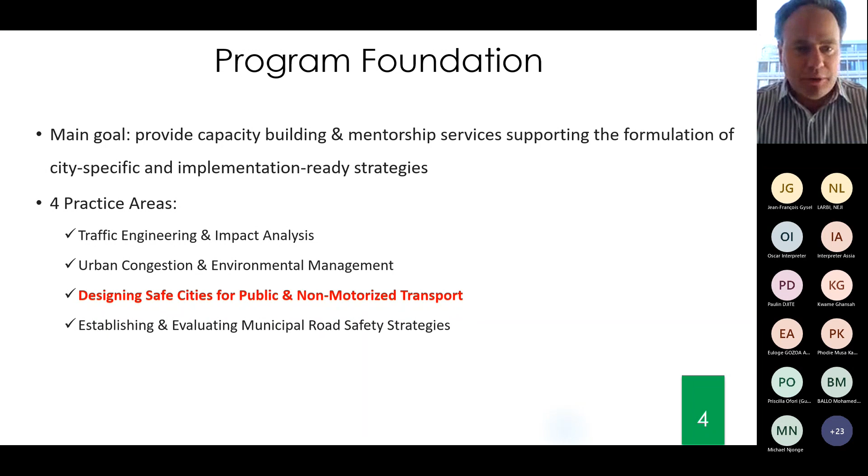Just a few words about the workflow, how we are delivering this program. We have an ambitious timeline. We started with an orientation webinar, which led to initiating 2 separate tracks: one focusing on traffic engineering disciplines in the context of fast motorizing cities on the African continent, and the other focusing on traffic safety. These are organized through two separate webinars. For those particularly interested in traffic safety, we will meet again on March 8th, where we will progressively transition from the engineering and design good practices covered today, to leadership and safety strategies at the urban level for African cities.

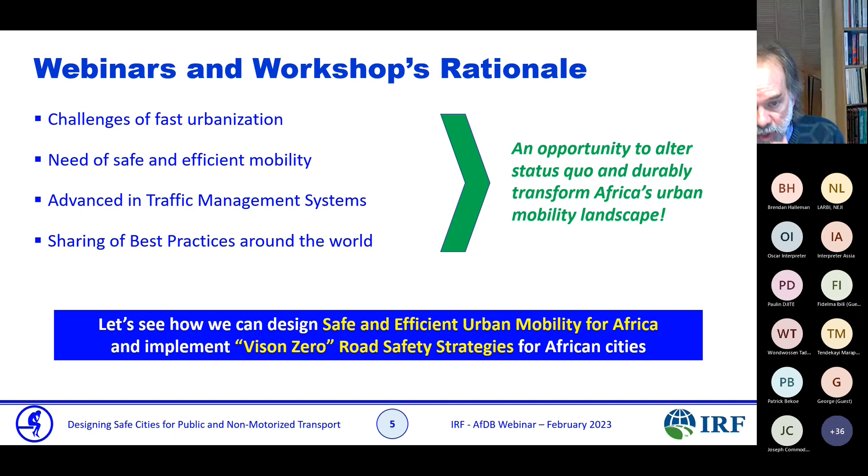So that's what we're going to be doing today. This first webinar we'll be talking more about engineering. The next webinar in March will be about Vision Zero and the strategies and political requirements necessary for implementing Vision Zero for African cities. So we'll be talking about planning and engineering, focusing on vulnerable users - pedestrians, cyclists, transit users, and motorcyclists.

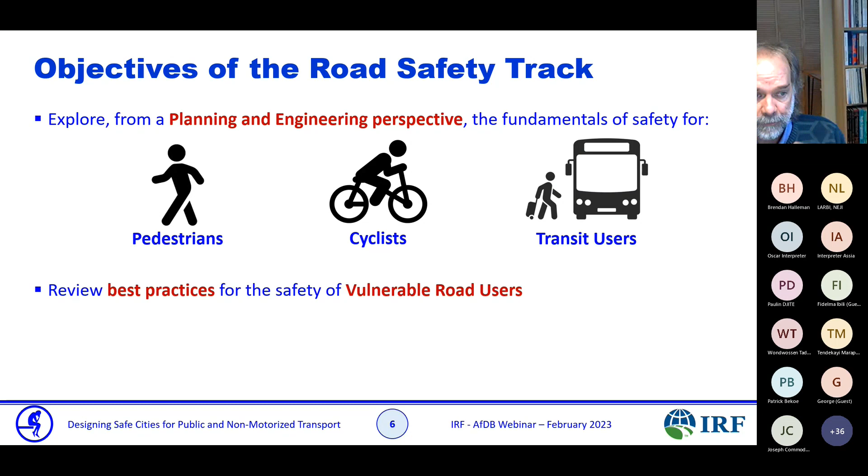We'll review best practices for those, and try to analyze what could be applicable for the reality of African cities. We'll explore what can be learned from other cities while shortening the learning curve, so we can leapfrog a couple of steps. This first webinar, today, will explore more the threats for life facing a wide number of road users in African cities.

And I think that's very important. Being vulnerable users, the key word here is vulnerable. How can we protect pedestrians and cyclists from being hurt by heavier, faster vehicles? So we need to look at their needs. They need to be able to go from point A to point B in a safe manner. We'll talk about how we can separate VRUs from heavier and faster vehicles.

How can we set up appropriate speed limits? Putting a speed limit which is not appropriate, not credible, not in relationship or coherence with the road geometry doesn't make sense at all, because it won't be respected. So that's something we'll be looking at. We'll also look at different street guidelines and how we can apply them.

But first, I'll spend a few minutes talking about the stats about the African context and road safety. Even though Brendan talked about it, it's good to look at that in more detail.

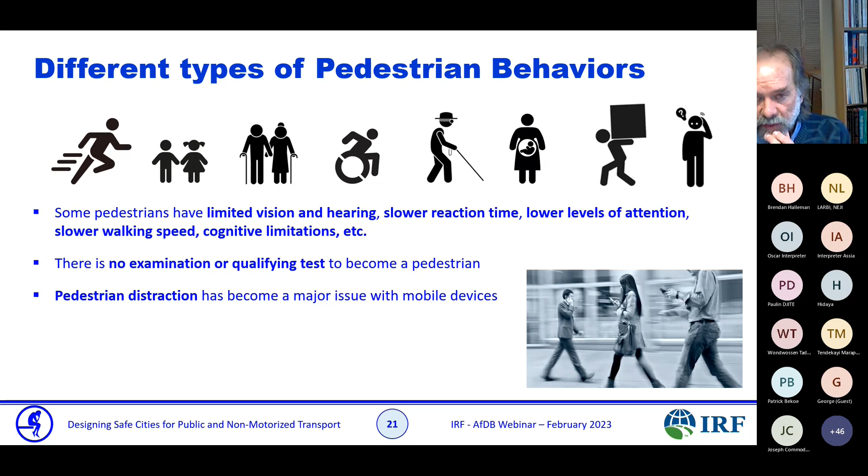I just want to say a few words about children pedestrians because they're very specific. They do have a different behavior from adult pedestrians. We need to take that into account. Their own perception of safety is not very well formulated. They don't realize danger the way an adult does. Their idea of critical behavior is not very well developed yet.

So the best way to improve child pedestrian safety is to keep them away from the road and make sure they've got somewhere to go, because if there is no space, they're going to go onto the road. The other interesting point is that we should not direct safety messages to them. We should direct safety messages to the approaching motorist. That's why we have specific signs about school zones and playgrounds where we tell motorists to watch out for kids, because the kids won't watch out for themselves. We need to warn the motorist in advance, letting them know there are kids playing around, there are schools, and the more we inform motorists, the better they can adjust their speed.

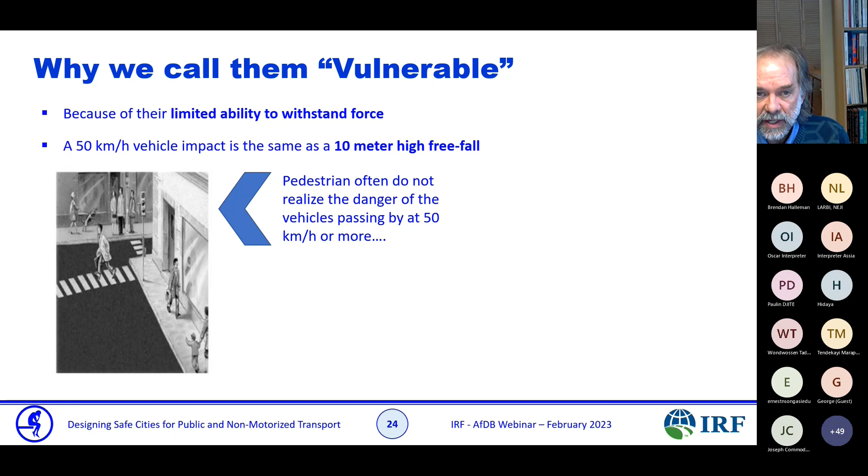Pedestrians don't realize when they're walking on the curb or crossing the street that it is exactly the same as being next to a 10-meter deep hole adjacent to the curb. If people could see a deep hole right next to them, they would be scared and would not get close to it. But we don't see them, we don't realize it, so we just walk on the street very close to the car, and people get hurt. We should know that and be aware of that.

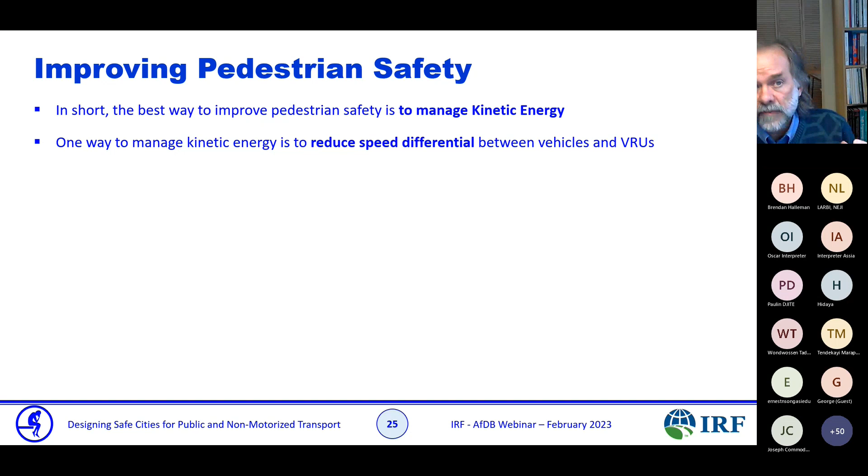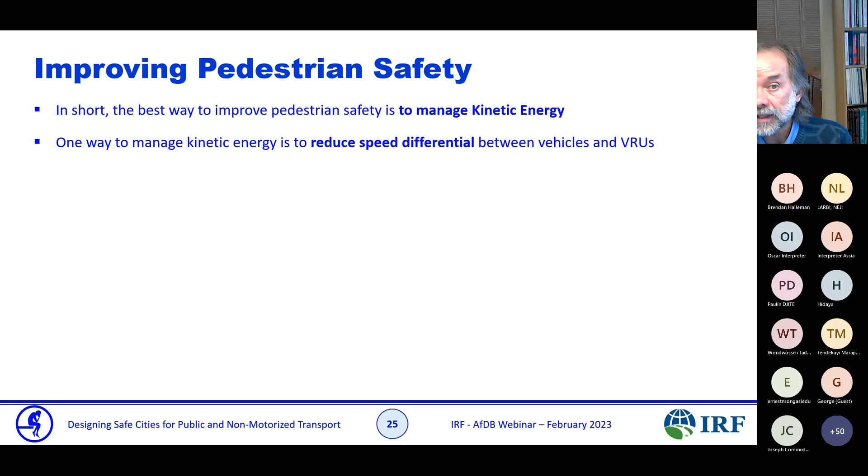How do we improve pedestrian safety? The best way to do it is to manage kinetic energy. One way of doing it is obviously to reduce the speed differential between vehicles and vulnerable users. The less the speed differential, the less likeliness of an impact, injury and death.

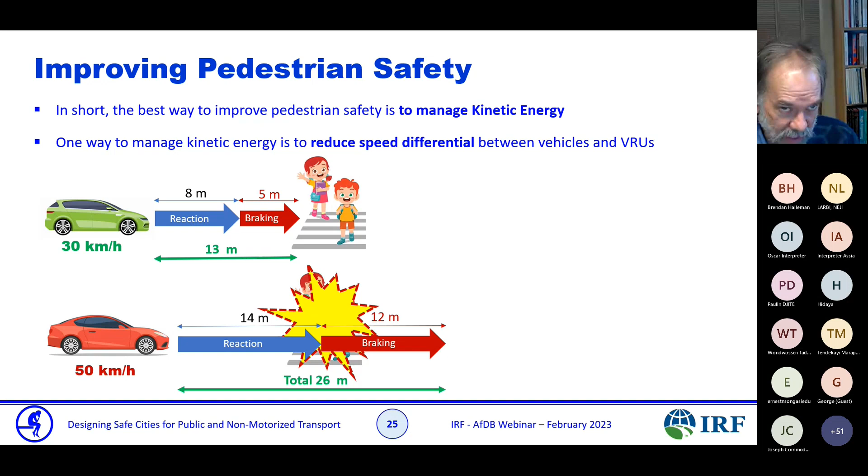That's why we're talking about reducing speed. It's making a lot of difference. The slower the vehicle, the more chance you have to avoid a crash, and if there is a crash, the impact is going to be less. At 30 kilometers an hour, your chance of survival is 90%. At 50, it's going down to 20%. At 70 kilometers an hour, you have no chance of surviving because your body cannot sustain the impact. You are going to die, for sure.

That's why we reduce speed and push on reducing speed near schools, hospitals, playgrounds, where you have pedestrian activities. This is one of the things we should look into when we talk about African cities, making sure that—because there are a lot of activities alongside the roadways—you've got vehicles driving by at 80, 100 kilometers an hour, very close to vulnerable users. They have absolutely no chance of survival if one of the vehicles hits one of the pedestrians on the side of the road.

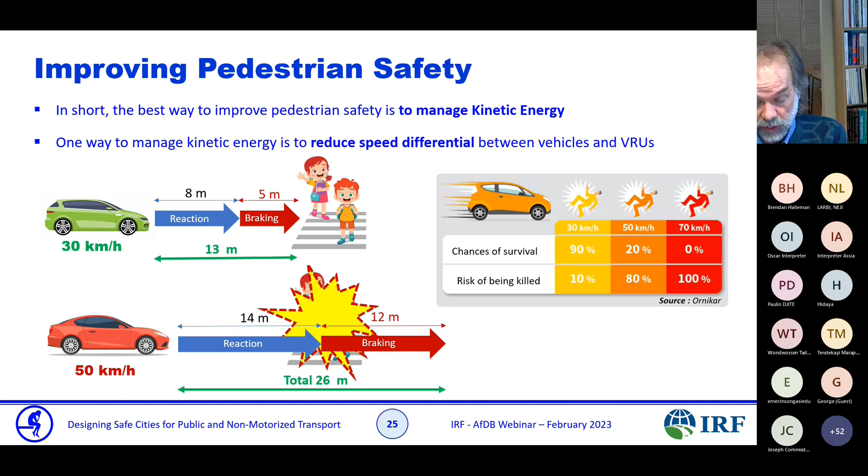So how do we improve pedestrian safety? First, we manage speed. We make sure we can adapt the speed limits to the street function and the local context. We absolutely need to make sure that speed is in accordance with what's happening there. One issue in African cities is that national roads cross villages and the road remains the same—straight roads going through, and it just says 30 kilometers an hour. But if the road itself does not change, or there is no geometric design showing a difference, people are going to be driving fast, no matter what the sign says. We'll show you how to do it in a couple of minutes.

We need to make sure we reduce speed around school zones, commercial streets, pedestrian areas, crosswalks, hospitals, bus terminals, bus stops—all those places where you have VRU activities, you need to manage speed. The other thing is signs and marking. We need to make sure motorists are informed about pedestrian activities. There are a lot of signs and markings that exist to warn drivers about pedestrian activities. We can have crosswalks, controlled or uncontrolled, stop lines, and signs for schools, playgrounds, and health centers.

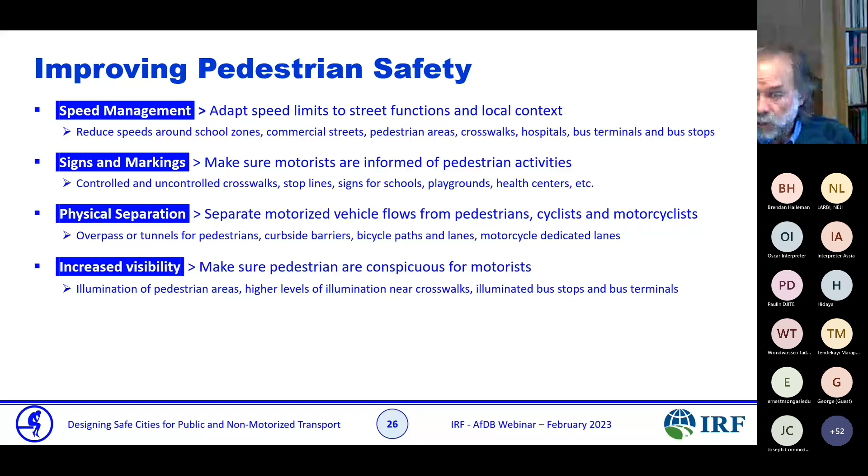That's what we look at, so we can implement a lot of small things that are going to improve safety overall. Another point is to increase visibility. Very often pedestrians are not seen, and when a pedestrian is hit, one of the things the motorist says very often is that I did not see him or her. So we need to make them conspicuous for motorists, with proper illumination of pedestrian areas, higher levels of illumination near crosswalks, and illuminated bus stops. We need to find ways to make sure VRUs can be seen.

If there are puddles of water, pedestrians are going to go around them and walk on the road to avoid walking in the water. So we need a network that connects major points of interest—commercial, institutional, health—making sure pedestrians can go from one to another or reach public transit access points easily. Another point is universal accessibility, allowing people in wheelchairs, people who have difficulty walking, blind people, deaf people, to be able to walk and use the network, with proper guidance to avoid conflict with motorists.

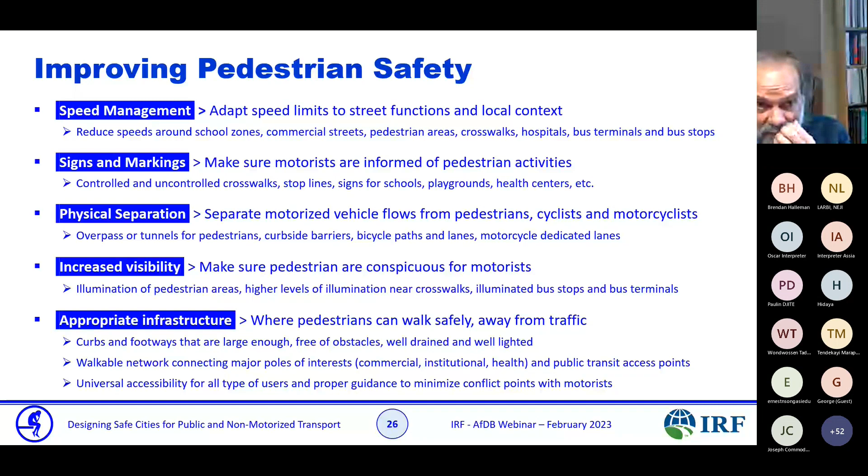So let's look at speed management in more detail. Some facts about speed, which are obvious—what I'm showing here is so obvious, but people don't think about it. We should be aware that speed is a factor in all crashes and all injuries, and that's obvious. If there is no speed, there is no impact, and if there is no impact, there is no injury and no death. So how do we get the right compromise between mobility and a sufficient amount of speed to be efficient and safe?

So speeding is associated with both the number of crashes and the severity of crashes. About 30% of all fatal crashes worldwide are related to speed. So that's one area where we can work and do something interesting to improve safety.

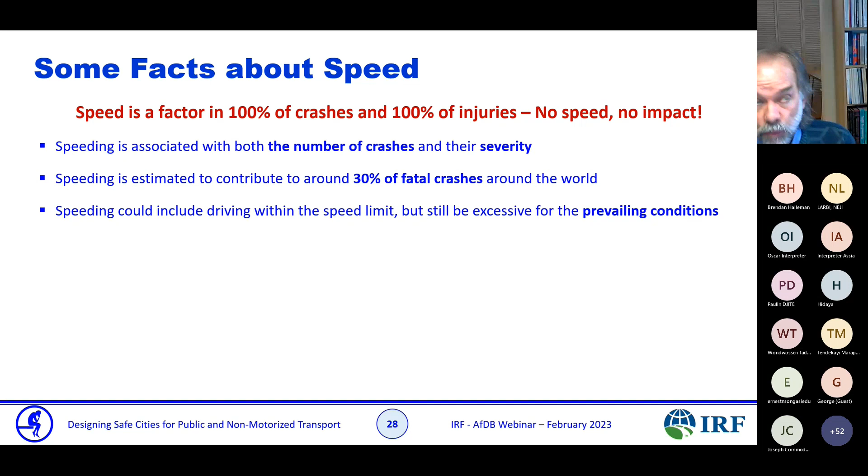Speeding could include driving within the speed limit, but still being excessive for the prevailing conditions, and we see that very often. That's why in many cities in the world, the speed limit in cities, which used to be 50 kilometers an hour, has been reduced to 40, and some cities, for example Amsterdam in the Netherlands, are reducing it to 30 kilometers an hour. So we are realizing that where there are vulnerable users, we need to reduce speeds, and we'll see how to do this.

Some parts of the road should be dedicated for mobility—those are major arteries, freeways, where vehicles can drive fast. But on those, we should not have vulnerable users. So where we have vulnerable users, on local streets, smaller arterials or collectors, we should make sure that speed is lower.

I talked about kinetic energy, I'll come back to it very fast, but many people don't know the formula. What I'd like to show here is that the kinetic energy of a vehicle is proportional to the square of its speed. So the risk of death for a pedestrian is not twice, but 4 times greater when hit by a vehicle at 65 compared to 50, because it's not linear. So that's something we should take into account.

Reducing the speed from 50 kilometers an hour, where your chance of survival is about 20%, going from 50 kilometers an hour to 30 raises your survival chance from 20% to 90%. That's exactly why we talk about reducing speed near school zones and where there are vulnerable users.

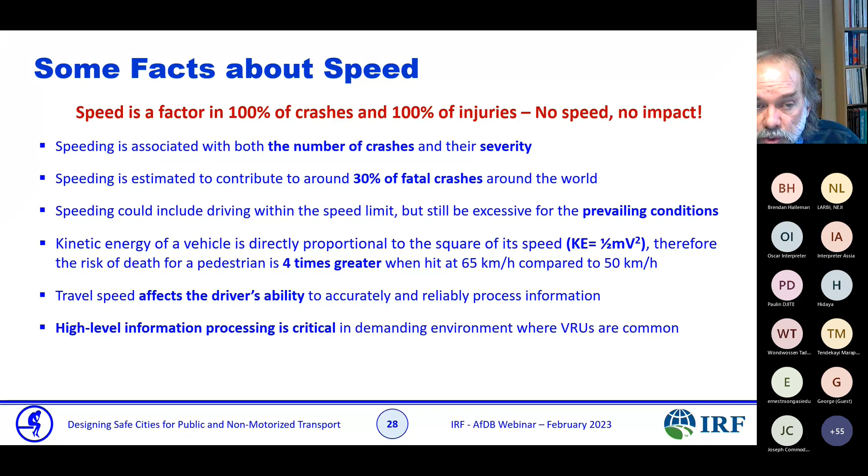However, high-level information processing is critical in a demanding environment when there are VRUs. That's another reason for reducing speed in areas where there are pedestrians, because the driver's ability to process information is slower. So speed management is absolutely essential to protect VRUs.

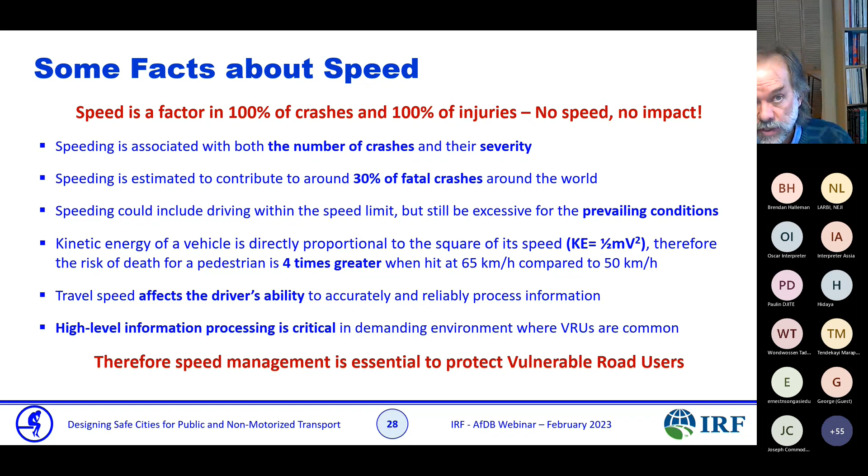There are several definitions of speed. I won't go too much into detail, but just to make sure you understand what we're talking about. Design speed is the speed we use as part of the geometric design process to design a road. It could be 100 kilometers an hour for a freeway, or 30, 40, or 50 kilometers an hour for a local street.

Operating speed is the speed at which vehicles are observed during free flow conditions, which is not the same as design speed. It could be higher or lower. For example, on major arteries in urban cities, on a wide boulevard, the speed limit could be 50 kilometers an hour, but because it's straight and wide with wide lanes, people tend to drive faster. On narrow streets, the speed limit can also be 50, but the operating speed is much slower because motorists are afraid of hitting something - it's narrow, with parked vehicles and pedestrians, so they drive slower.

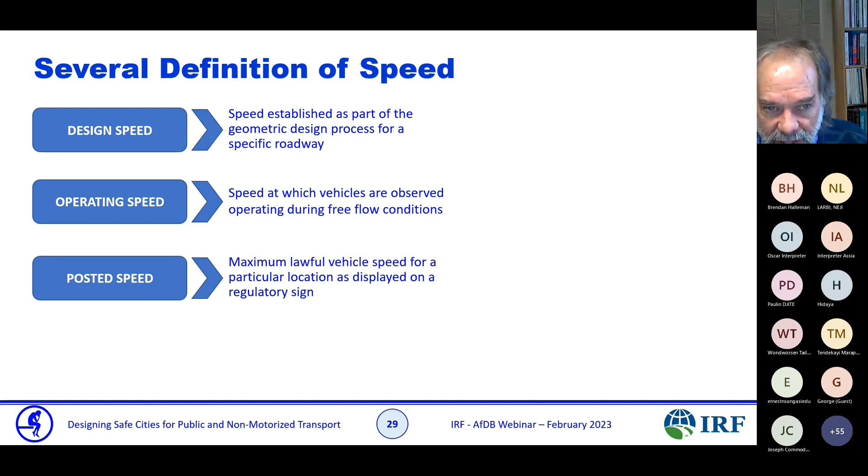So it's not related to the speed limit, which is a posted speed we can see here - that's the maximum lawful speed for a particular location as displayed on the signs.

Statutory speed is the speed limit established by the governing agency. For example, in France, the speed limit for freeways is 130 kilometers an hour. In the Emirates, it's 160. In Canada, we take safety very much into account, so the speed limit on our freeways is only 100 kilometers an hour. It depends on the country and the governing agency.

That's why pedestrian safety has two levels, and I'll talk about it a little more. It has to be top down, where government has to take action, but it also has to be bottom up, where we can have local action directly on the street, concrete action to improve safety.

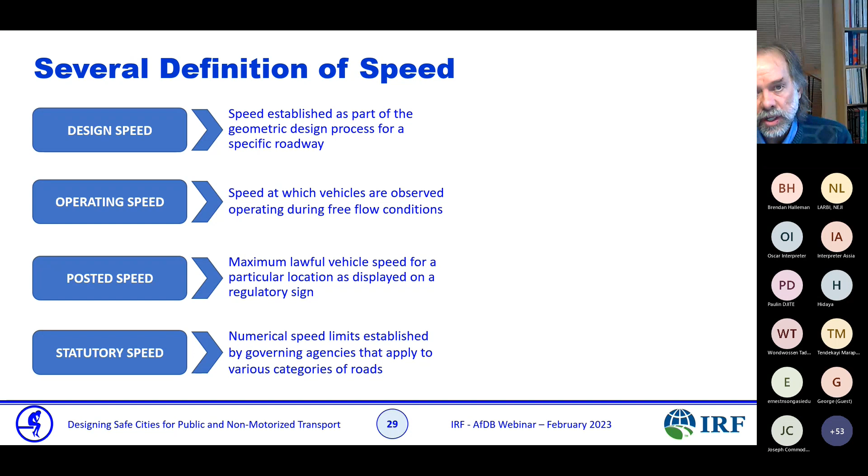The last point I wanted to talk about is the 85th percentile speed. That's something we use very much in engineering. It's a point in the speed distribution at which 85% of vehicles travel at or below, so it's considered the maximum safe speed for a location under good weather and visibility conditions.

So those are just facts to keep in mind when you do your design, when you think about your own area and how you can improve it. You should know those definitions of speed and the right one to use.

Consequences of speeding for drivers: as I said, it reduces the visual field and reduces the ability to accurately and reliably process information. There is more distance traveled during the perception and reaction time because we are driving faster, stopping distances are longer, and there is a greater potential for loss of control of vehicles.

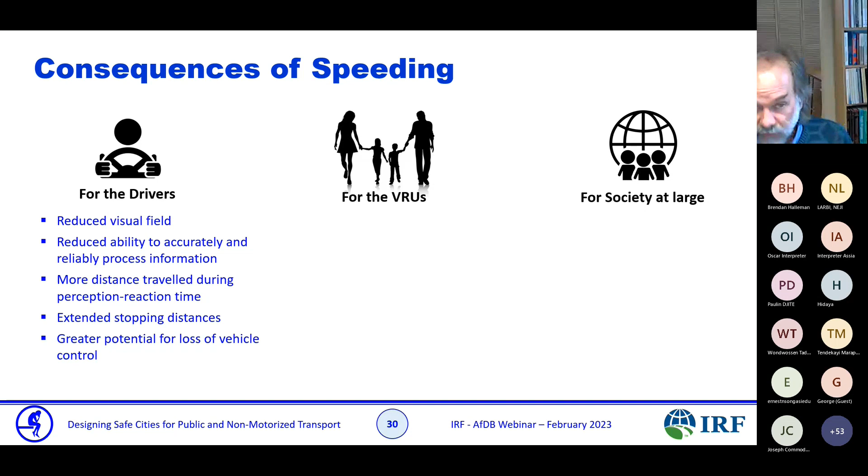For the VRUs, there is an increased feeling of insecurity when vehicles are speeding, reduced time to cross the street, reduced time to react to an event, increased severity of injuries, and obviously increased death probabilities in crashes.

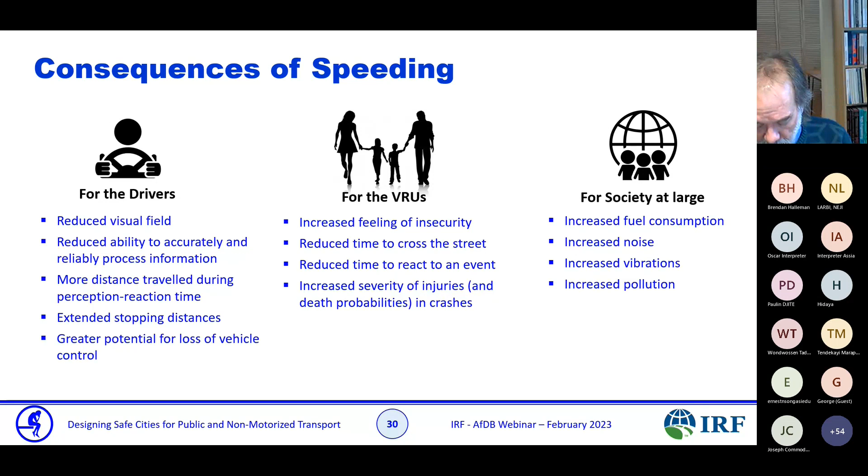And for society at large, we should take this into account as well - more speeding means more fuel consumption, more noise, more vibration, more pollution, and that's something we should look at. We should keep the environment in mind.

So what's happening in speed management currently is that the speed limit used to be aligned to driver preference for high speed travel.

As roads were being built and vehicles became more performant, people tended to drive faster and faster. It took a long time before we started limiting and reducing speed on highways. Before that, it was open, and in some countries it's still wide open. For example, in Germany on the Autobahn, you can drive as fast as you want on some sections, which is kind of scary. But statistics show they don't have more accidents than average. However, when they do have accidents, they are really bad, usually because of the speed.

Another interesting point is that most drivers tend to underestimate the likelihood of an adverse event that may cause harm. Most drivers don't think about a hazard.

I'm traveling quite a bit, and the most dangerous part of my travel is usually between my home and the airport, even though that's what I do all the time, driving my car or motorcycle. People tend to be more afraid of taking a plane than driving on the road, because they drive so often that they don't see the danger. But you've got much, much more chances of having an accident on the road than in a plane.

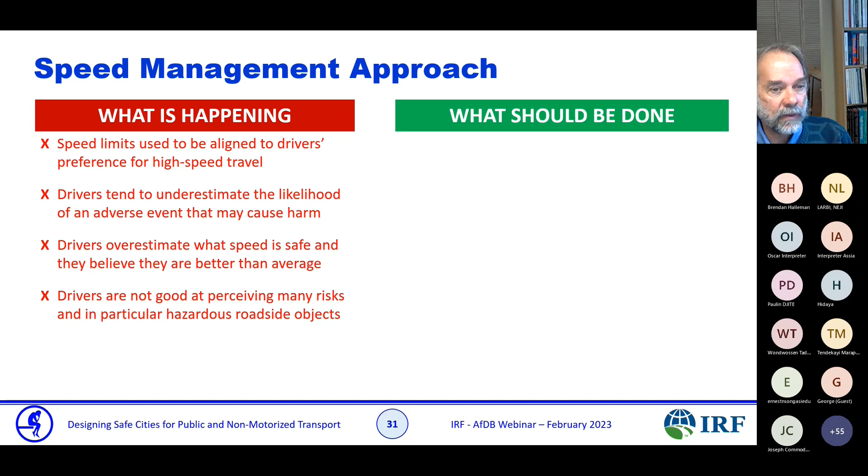The last point is that drivers are not good at perceiving many risks, in particular when there are hazardous roadside objects. People think in series, not in parallel, so we can do one thing well at a time, not too many things at once. When there's a lot of action and stimuli for the driver, they cannot perceive the risk properly.

So what should be done? We should manage speed, but the focus is not to lower speed all over. Despite what I said previously, the idea is not to put everything at 30 kilometers an hour. That's not the point. The point is to match mobility needs with the surrounding environment, the infrastructure, and safety. And that's not easy to do.

Motorist speed is directly influenced by the message sent by the road and street surroundings. So here we are talking about the coherence between geometry and speed, and that's what we do. I'll show you a couple of examples of how we do this.

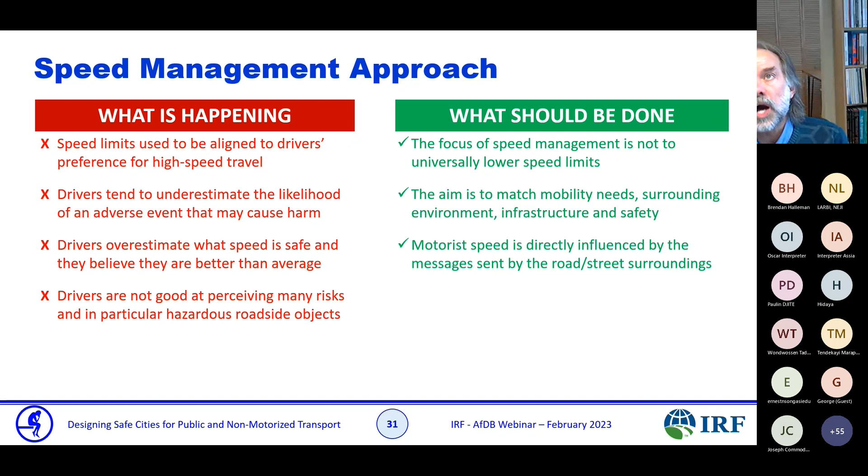We should let the road talk to the motorist. If the road is straight and wide, people are going to drive fast. If it's narrow, if there are obstacles on the road, markings and obstacles that push them to reduce speed, they're going to do it much more than any sign or marking on the road.

Speed limits must be established to take into account the human biomechanical tolerance limit. It's really crazy to allow vehicles to drive over 50 kilometers an hour near vulnerable users, because the biomechanical tolerance of a human isn't going to work if they get hit. They're going to be injured severely or die. So that's what we need to avoid.

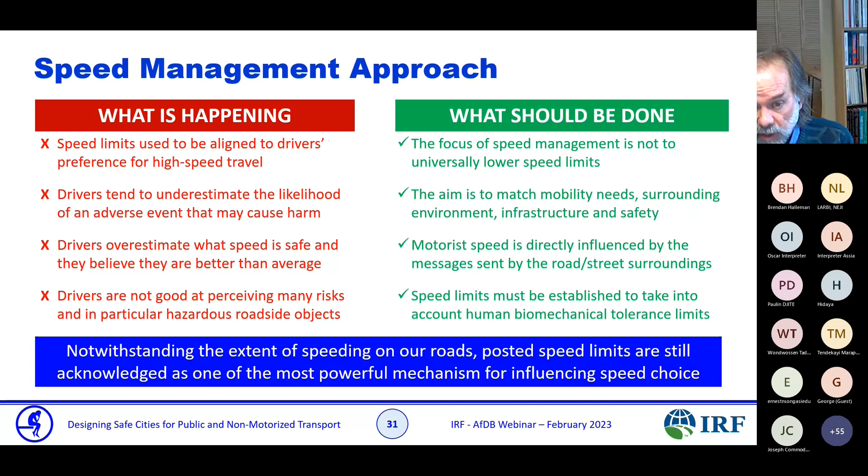Notwithstanding the extent of speeding on our roads, surprisingly, the posted speed limit is still acknowledged as one of the most powerful mechanisms for influencing speed choice. So we should use that. We should post the right speed limit, but not do it by itself. We should complement the posted speed limit with a lot of engineering, different solutions, traffic calming devices that I'm going to talk about, that will help reinforce the message that the posted speed limit gives.

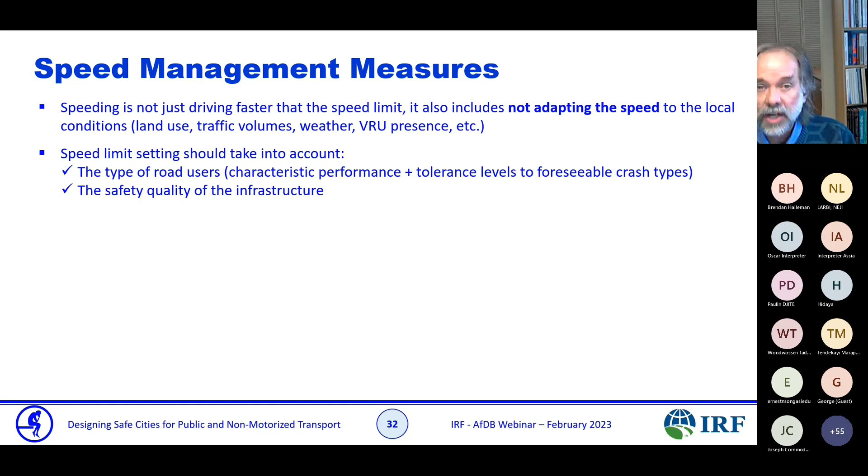Speeding is not just driving faster than the speed limit. It also includes not adapting the speed to local conditions. That's important to know. Speed limit setting should take into account the type of road user, as I said, and the safety quality of the infrastructure. Sometimes the infrastructure doesn't allow for higher speed because it's not in good shape, it's not well drained, and we should take this into account.

And I stopped there because I wanted to see if it had any effect, and nobody reduced speed because it doesn't make sense. If it's not credible, motorists won't respect it. We need to make sure it's credible, making sure we use the right road hierarchy, and see the difference between mobility and access function. I'll talk more about this in a couple of seconds.

Speed management requires several initiatives: setting appropriate and credible speed limits, adapting infrastructure and road geometry to the targeted speed, and ensuring adequate enforcement of the speed limit.

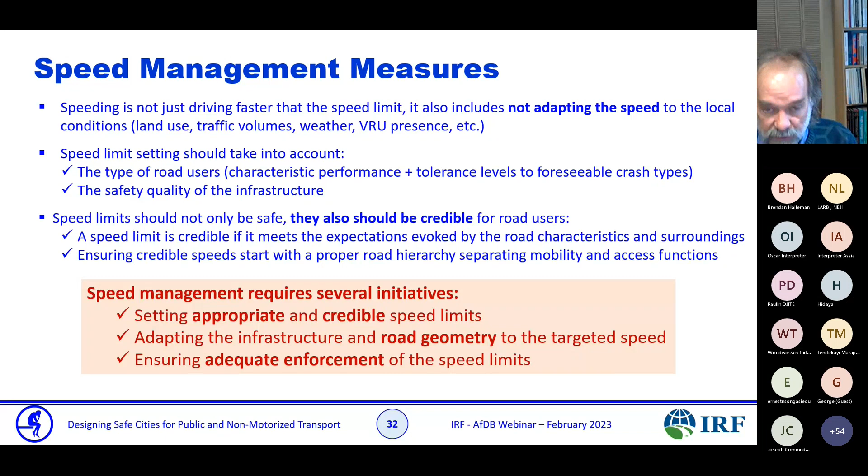Each road has a specific function. Some are favoring mobility and some are favoring accessibility. Road users understand the road hierarchy and usually they behave accordingly. VRUs and commercial activity must be controlled to reduce the incompatibility of mixed functions. That's very specific of Africa.

We should look into that specifically. Road designers and land planners should stop favoring motor vehicles to the detriment of VRUs. That's one of the main trends of perhaps the last 20 years, and the decade of road safety has been implementing this. We have been focusing very much on motor vehicles. The car was the king of the road. It should not be this way anymore.

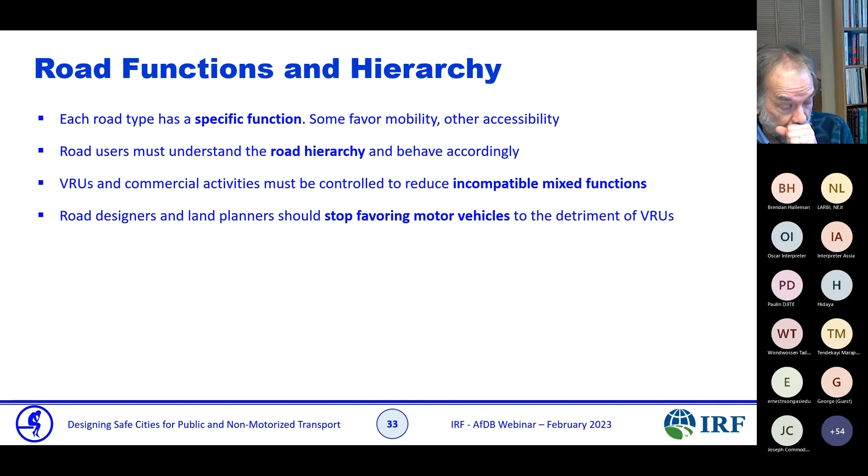We should favor much more active transportation. We should protect vulnerable users because it's good for health, because it's what most people can do - walk and use their bicycles - and it's cheaper and better for the environment. So motor vehicles and cars, I'm not saying they are not good and we should not use them, but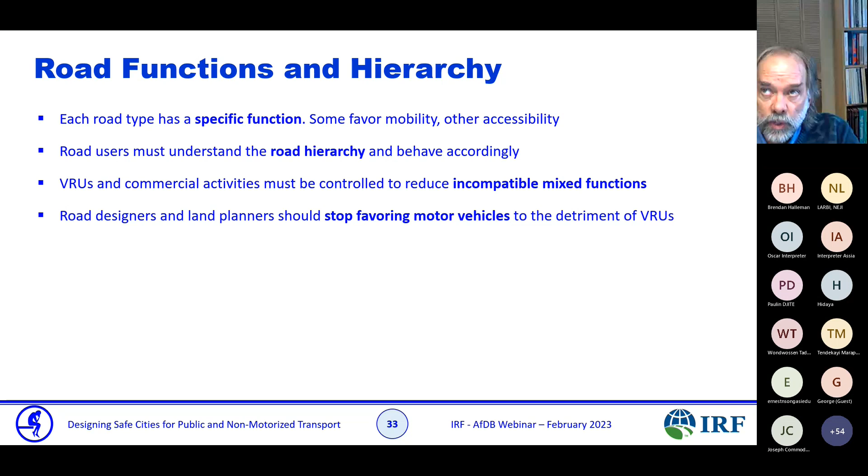they should not be in the center of all we do. What should be in the center of what you do is the human. We should have a human-centric design and reflection. That's my next point here. Road designers and land planners should develop a human-centric approach in their work. We should develop - I'll show you how - a bottom-up vulnerable user scheme.

Start from what the local conditions are, what are the possibilities to work specifically on the local area to improve the pedestrian network: sidewalk, curbs, signing, design. At the same time we should have top-down government initiatives and bylaws that will help that.

The other thing we should try to do is make the best use of advanced technology. As you know, we are going into the Internet of Things. Vehicles are going to be more and more connecting to the road and to other vehicles, and we should try to see how we can use that to improve and enhance mobility and safety, which is quite interesting. What I'm afraid of, and that's why I wrote this last sentence here, is that we could leapfrog, because technology allows that. However, it's important to progress step by step.

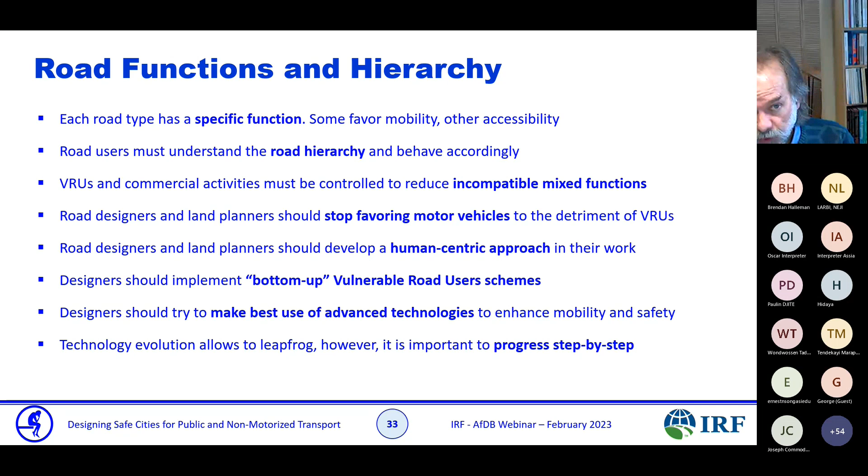In many African countries, for example, the phone network has not been well developed, and you went directly from not having a phone to the mobile phone with Wi-Fi, skipping the fixed line that we did have, which is fine. But by jumping over that, sometimes you are jumping over very important actions. So remember that in the way you work, you need to progress step by step, and make sure you can use experience from others and what they've done, on the positive side but also on the negative side.

Road hierarchy - here I show you a quick picture. This is what a road hierarchy looks like. On the left-hand side you can see a freeway. You can see separate lanes, no accesses, cars can drive fast, and there are no vulnerable users on the road. That's what it looks like.

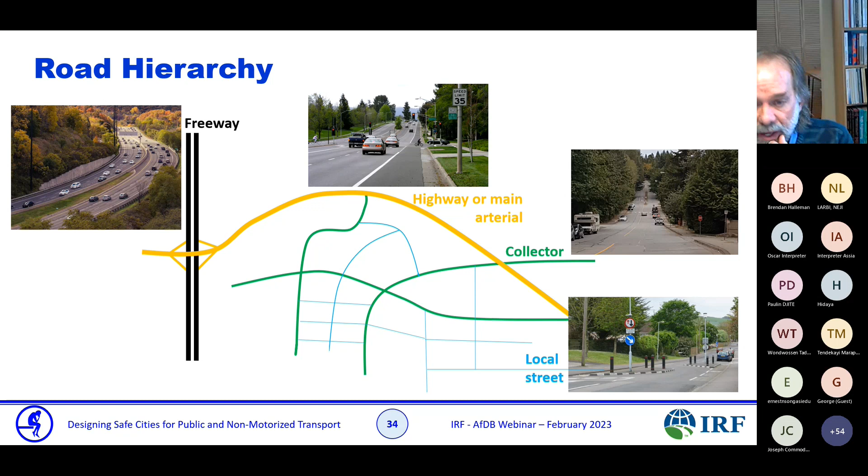On the top center here you've got a highway or main arterial, which is a wider road. You have controlled access, traffic lights, and usually the vulnerable users are separated - you've got curbs, sidewalks, and bicycle lanes. Then in green here you've got collectors, which are narrower streets with curbs and parked cars. Eventually you come to a local street where you can have very specific traffic calming devices implemented. Here you can see a chicane that helps reduce vehicle speed.

Very often, national roads cross linear villages without any modification of the road geometric design. So we should warn motorists that they are entering a village, entering commercial activities. You should have markings, signs, speed bumps, gateways that will help tell people to watch out for vulnerable users.

Speed limits are not credible due to a lack of coherence with the surrounding environment. Too many uncontrolled roadside activities along the road, and uncontrolled commercial activities and street vendors within the right of way. That's something we should look into and try to control.

Also, there is an issue with parking space for motor vehicles. They need to stop their car, and very often there is no space, so they park directly on the road. So, speed management process program, how do you do it?

Well, you need to identify speeding issues, determine partnering agencies - that's something that should be done in coordination - identify countermeasures, implement countermeasures, and evaluate the project and program to make sure that it's working.

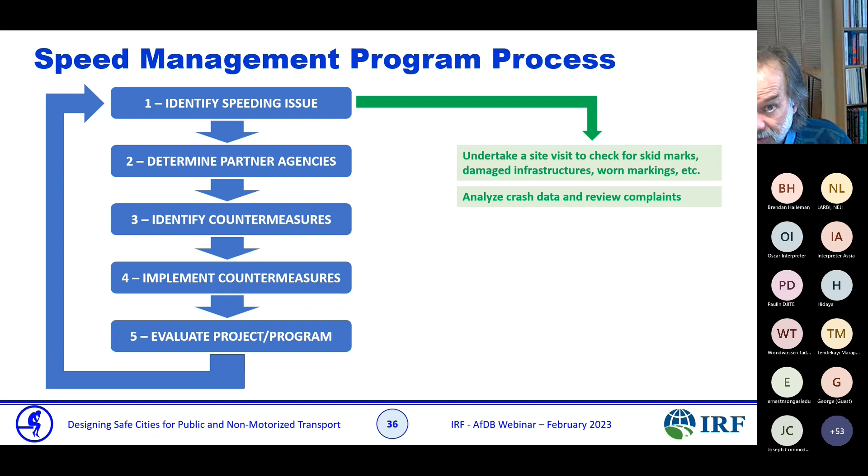Do you have crash data? And do you have people complaining that cars are driving too fast? You should do a speed spot check and validate the data. Is it an issue or not? Very often people perceive speed as too fast, but when you do a spot check, it's not going too fast.

It's just a perception. You should analyze the coherence between posted speed limit and the surrounding environment. If you have a national road with a speed of 60, 70 or 80 kilometers an hour near commercial activities and vulnerable users, it's not proper, it's not coherent. You should search for unexpected conditions or types of activities.

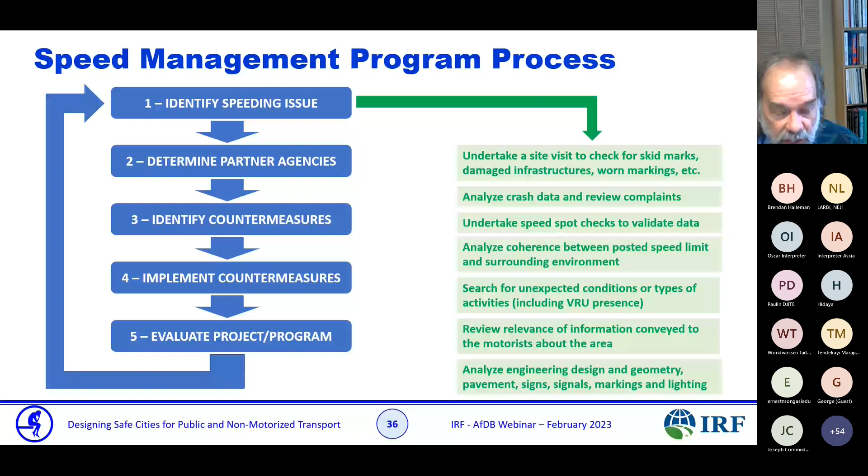For example, VRU presences. You should review the relevance of information conveyed to the motorist about the area. Is the motorist aware of commercial activities and vulnerable road users? Is the motorist well informed in advance of a danger? And of course, engineering design, geometry, pavement, signs, signals, marking - I'll show you examples in a couple of minutes with pictures.

Speed management tool, we'll talk about this also in the next webinar, but we should implement a safe approach: safe road, safe speed, safe vehicle, safe people. It's not only safe road or reducing speed. It's a global approach that takes into account the different elements - vehicle, people, speed, roads - making sure all of them are safe.

We should make sure the infrastructure sends the right message to the road user. We need to help drivers see and understand the risk by posting credible speed limits. If it's not credible, they won't look at it and they won't understand the risk.

We should have awareness campaigns. We should enforce the speed limit with police control and fines. I know that's very difficult in many low-income countries. I know in many countries there is a lot of corruption, and people can easily, instead of paying the fine, give a little money to the policeman and say, let me go. That's very much linked with the income of the country. I'm fully aware of that, but it's something we should work on.

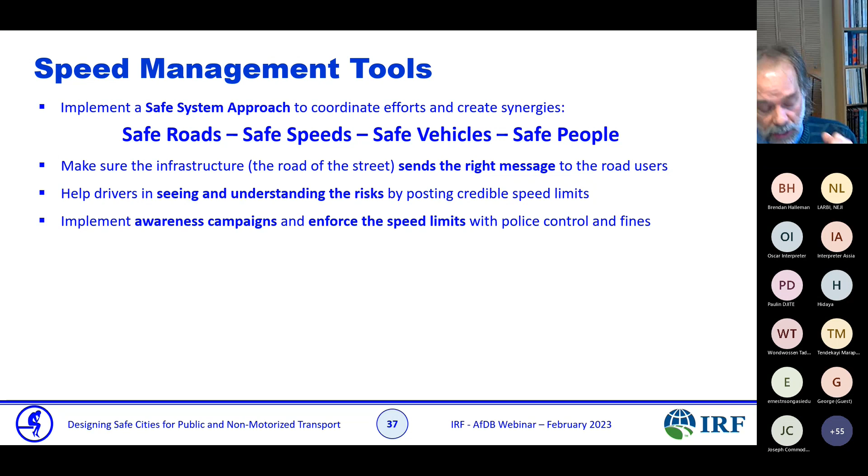One way to improve safety is what we call the carrot and the stick. The carrot is we should congratulate people for behaving properly, but we should use the stick to tell them that's not the way to do it. That's not an easy balance to get, but we should be working on it.

We should educate all road users. As I said, pedestrians and cyclists are not licensed, they don't know the rules of the road. We should enforce them and make them aware of the danger. We should impose vehicle speed reductions through implementation of traffic calming devices, which we'll show in a couple of seconds.

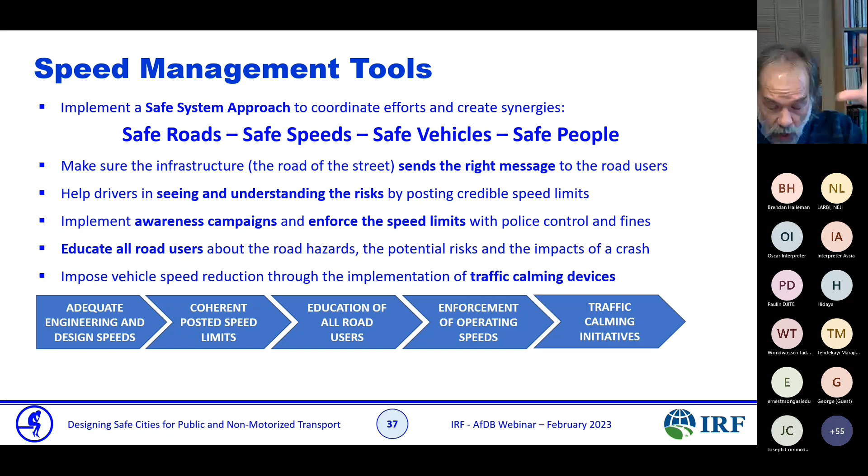So the way of looking at it is: first we start with adequate engineering and design speed, make sure we have coherent posted speed limits, make sure all road users are well educated, ensure proper enforcement, and start putting in traffic calming devices. On top of that, we should have self-explaining roads that talk to the motorist by themselves. Another point is forgiving roads, because we know people make mistakes. So if a motorist or vulnerable user does make a mistake, is there a way to avoid a major injury or death?

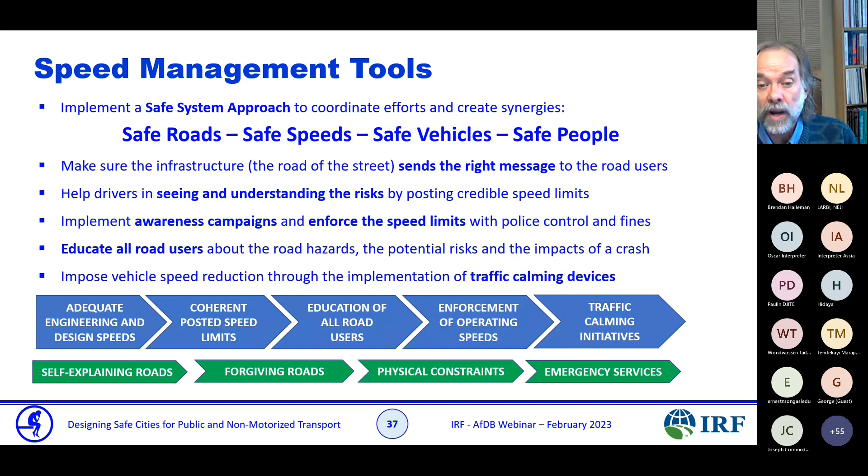Can we implement physical constraints to make sure that if a vehicle goes off the road, it's not going to fall off a cliff or drive on the curbs? And the last point is making sure we've got proper emergency services if there is an accident. The best idea is, of course, to avoid an accident, but if there is one, how can we limit the consequences? We'll talk about all this in the next webinar.

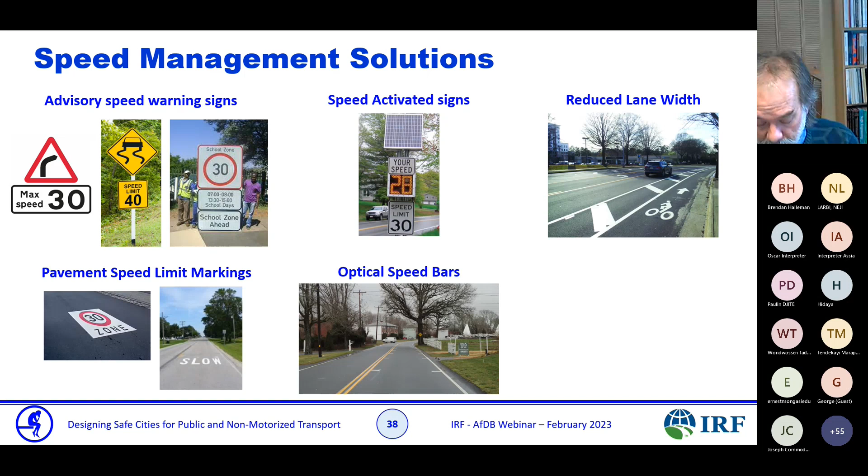Another thing that works well is optical speed bars. Those are small bars along the road, as you can see on the picture, and that creates an effect of narrowness for the driver. By instinct, the motorist is going to reduce speed because he's going to feel that it's narrower, and that's quite efficient. Reducing lane width is the same thing - it just makes people think it's narrower, so they're going to be driving slower.

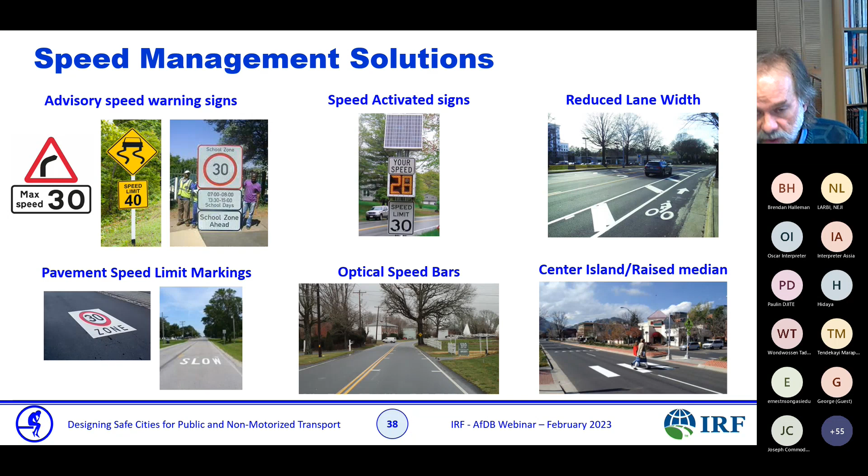Another thing is center island, raised median. So it gives a chance for pedestrians to cross the road in two parts, and while they are waiting in the middle of the road, they are safe because they're on an island and somewhat protected.

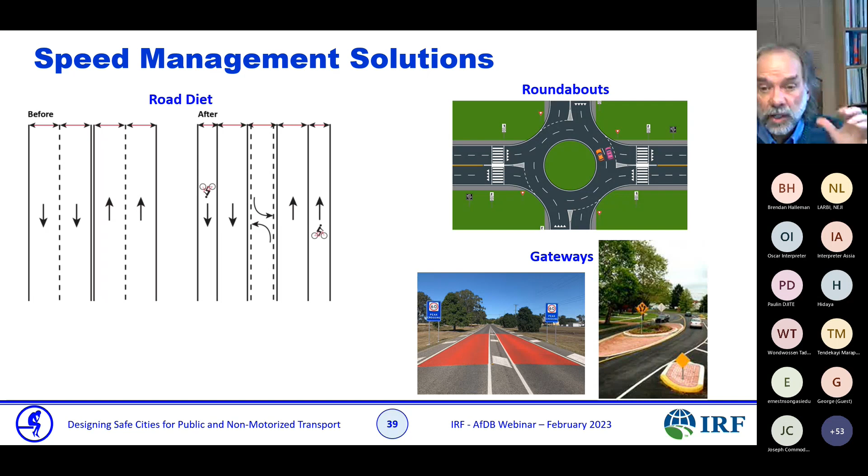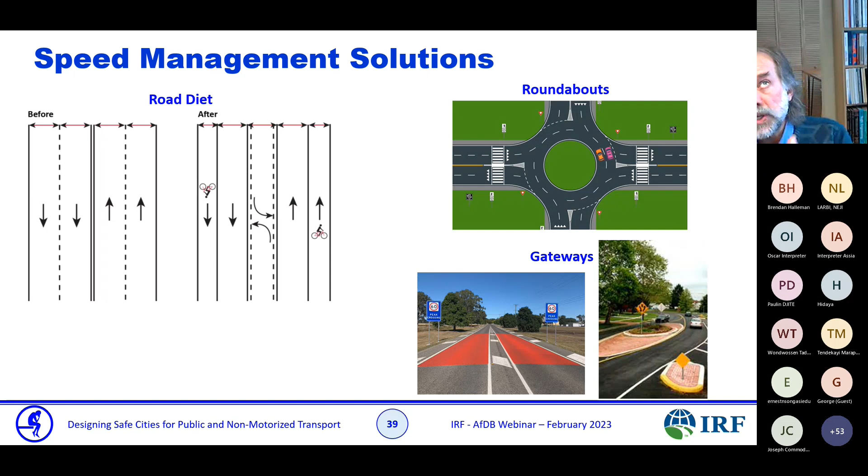Gateways are a way to say, watch out, you are entering a zone where the speed is going to be different - you should be reducing speed. Putting the sign by itself is not going to be efficient, but gateways, where the driver has to turn or can see that the road talks to him or her, make a huge difference. Gateways should be used in African countries much more than that - it's one of the most efficient devices that should be used in African cities.

Let's look at traffic calming quickly. Traffic calming is designed to encourage uniform vehicle speed and improve safety conditions, obviously for VRUs, by implementing devices. They are usually used on streets or roads where the speed is lower than 50 kilometers an hour. Obviously you cannot put a speed bump in the middle of a freeway - it doesn't make sense, you are going to create accidents. It has to be in places where the speed is already lower.

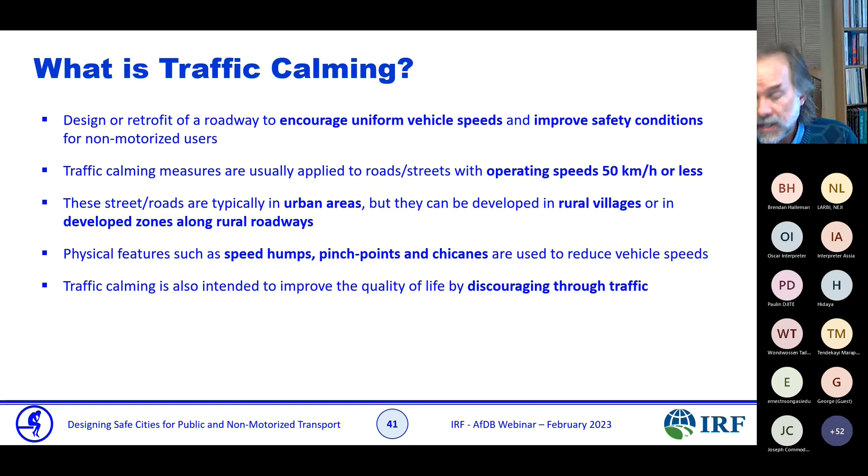So usually it's done in urban areas, or it should be done in rural villages. But if you do this, first of all, you should have a gateway that tells motorists, watch out, we are going to be reducing speed. You need to make sure motorists reduce speed before you implement any traffic calming device. They can be speed humps, pinch points, chicanes, or other methods - I'll show you a couple of examples. The idea also is to discourage through traffic. Sometimes people use local streets to bypass congested areas, and you want to discourage that by prohibiting through traffic.

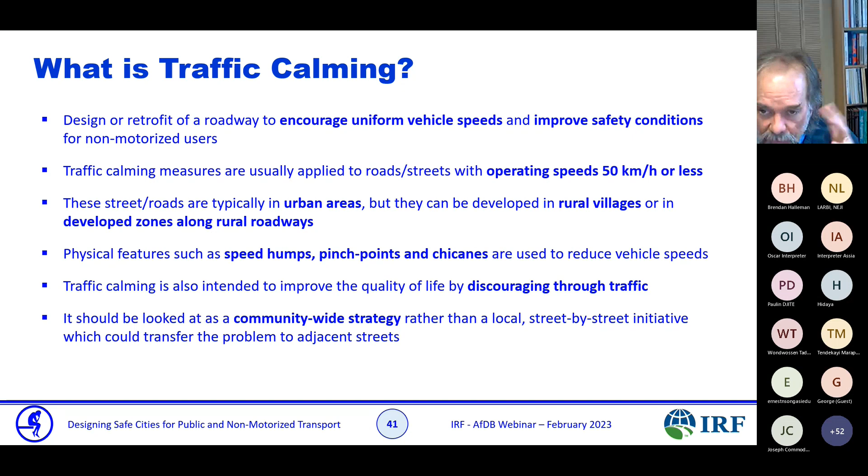Another important point: this should be a community-wide strategy, not a local street-by-street initiative. You should not put a speed bump somewhere on a street by itself. That should be done within a neighborhood-wide vision. I'll show you a couple of traffic calming solutions.

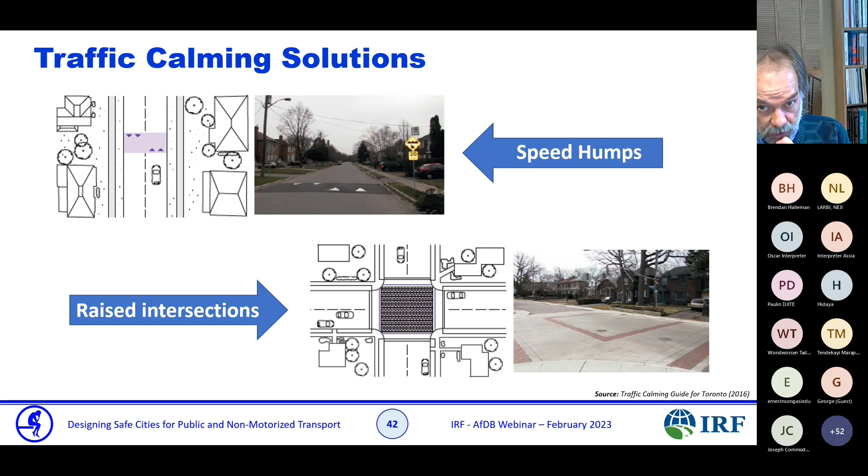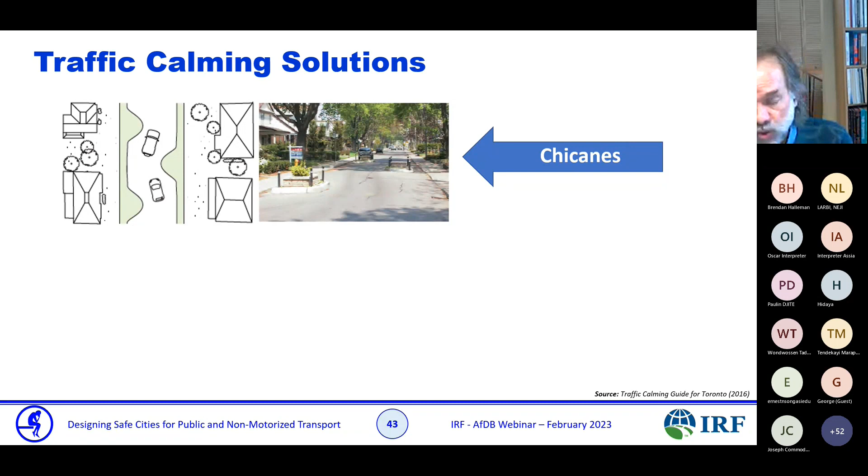Chicanes. Here you can see the driver has to drive around obstacles, what we call chicanes, reducing speed to go through those left and right turns. We can do that through curb extension as well—we extend the curb, which provokes a kind of chicane, or half chicane perhaps we should say. That helps very much.

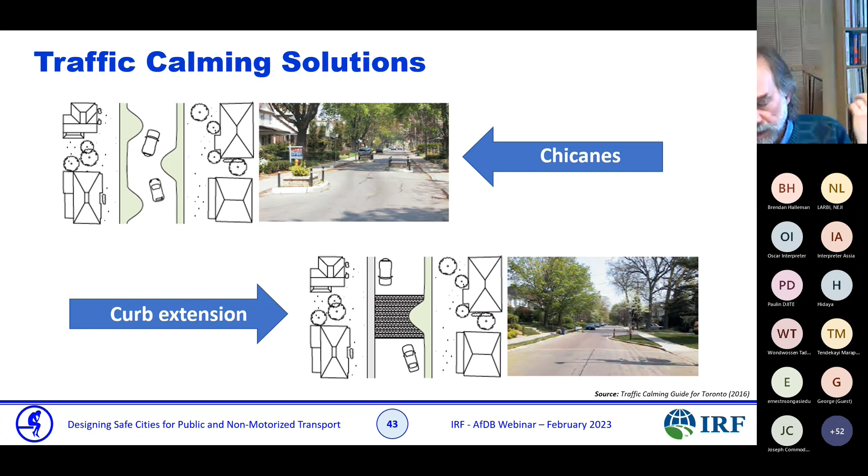All those examples, by the way, are taken from the city of Toronto, which is about 500 kilometers from Montreal, where I live.

Traffic islands. You put some obstacles on the road, and of course those need to be conspicuous—motorists need to be able to see them quite well—but that's very efficient to reduce speed.

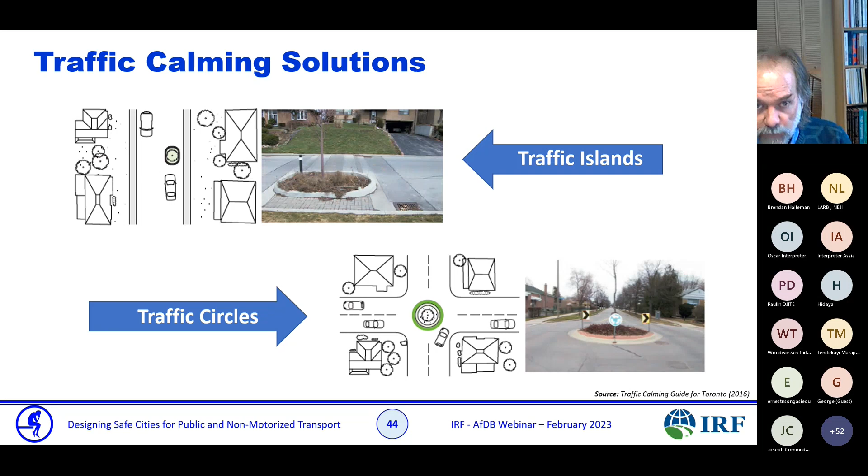Small traffic circles impose some kind of movement on a driver, so they're going to be slower by using it. Bumps—in our cities, very often we've got alleys behind streets.

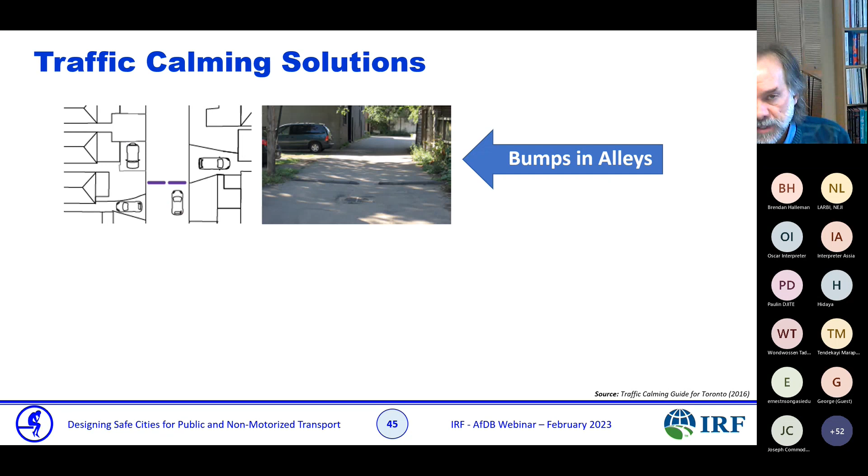Very often we've got alleys for services and emergency services, and people tend to use them as shortcuts. So we put bumps so they reduce speed, because very often kids are playing in the alleys.

Curb extensions have two advantages. They reduce the crossing distance for pedestrians, so it's safer—they are less exposed—and at the same time they permit parking.

It protects parked vehicles. On the other hand, the previous example showed curb extension, but curb radius reduction works as well, because the smaller the radius, the slower the speed. When it's almost a right angle, you cannot turn as fast as when the radius is higher.

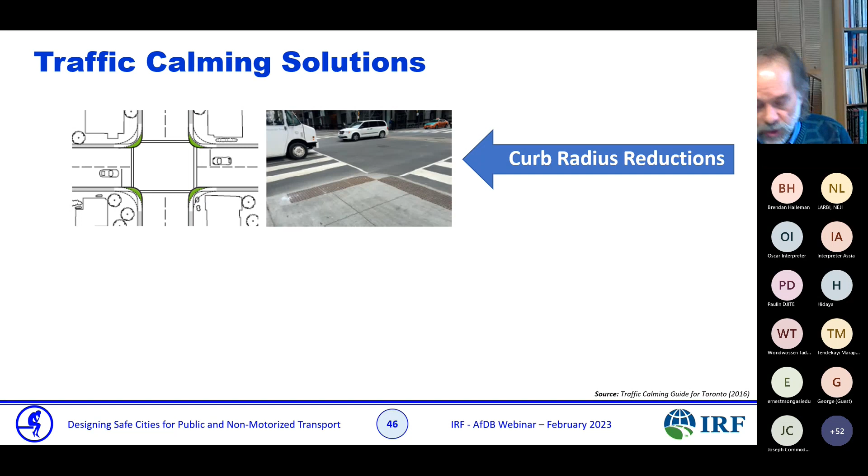On-street parking: as you can see on the picture, when you have on-street parking, the effect is to reduce the width of the road, so people tend to drive slower.

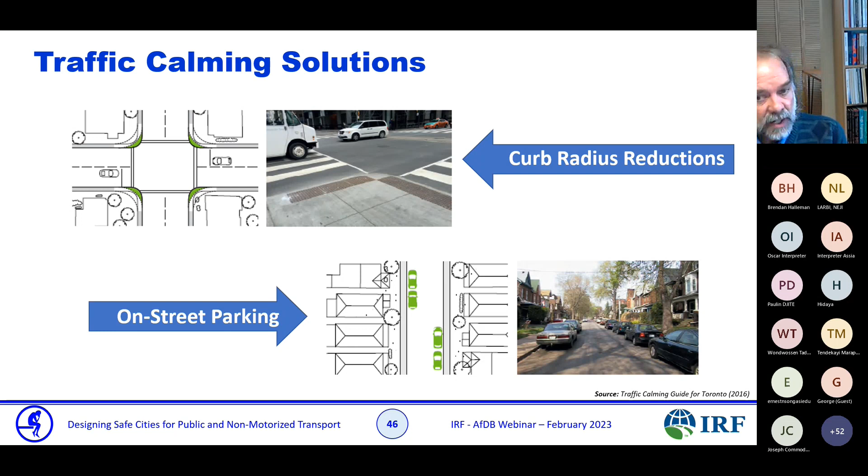One disadvantage is that if you've got kids playing on the road, you won't be able to see them—you don't see the vulnerable user. So there is some kind of hazard with on-street parking that should be taken into account.

Raised median island, I told you about that. It protects the vulnerable users, as well as narrowing the lane width.

Directional closures—what we sometimes use is to make a one-way street, and one way of doing it is just putting an island, which closes one side of the street.

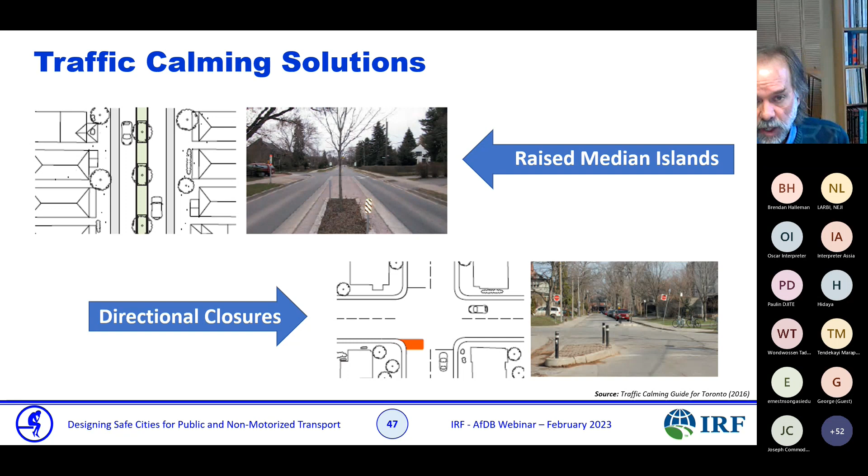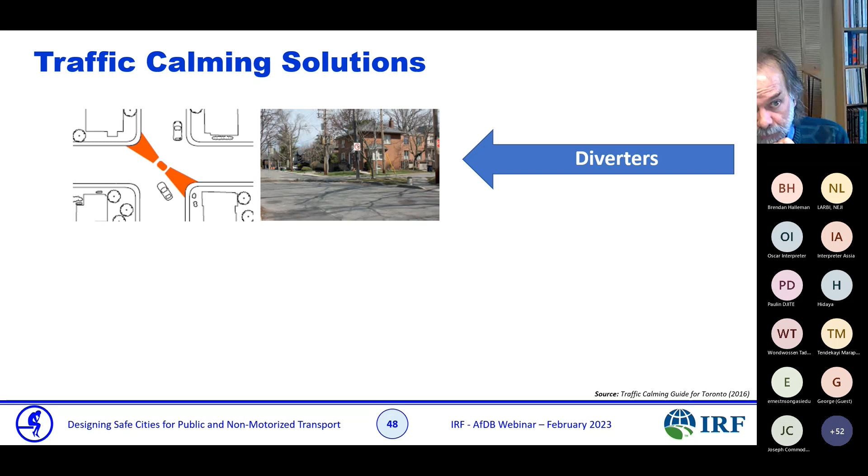Diverters allow you only to turn right or left at an intersection. You don't prohibit all movements—you just separate movements. It's very efficient to avoid through traffic and it reduces conflicts, obviously.

Or full closure—in many cases they decide to close streets completely to vehicles, actually turning them into pedestrian streets, and we'll see a couple of examples of that.

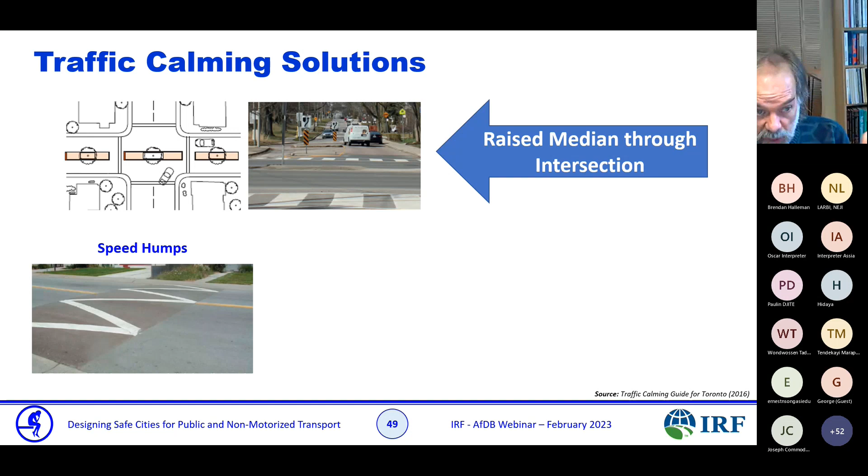Raised median through the intersection always works quite nicely. Speed humps, mini roundabouts, traffic circles—as you can see, we do have a lot of devices that we can use as traffic calming devices.

I'll show you application in the African context. That's the last part of the presentation.

Before that, what are the weaknesses that need to be improved, that we need to work on? One of the things we need to work on, which will be the object of the next webinar, is the institutional framework for traffic management. It's quite poor in general in Africa, and we need to improve that.

We need better data—we don't have reliable data on traffic, on safety, on mobility. The more data we have as engineers, the better we can work. There is a lack of demand forecasting and analysis. If we can forecast, and we need data to forecast—if we have data, we can forecast, and if we can forecast, we can design.

So it's all linked. Traffic impact analysis - that's the other side of the webinars we are working on today. I'm on the road safety side, but on the traffic impact analysis, which is the other pillar, if we have proper traffic impact analysis for developments, you can right away implement the proper design.

The other thing is the famous 3E, which is engineering, education, and enforcement. It's weak in Africa in terms of all the 3Es actually - engineering, education, and enforcement. We need to reinforce that.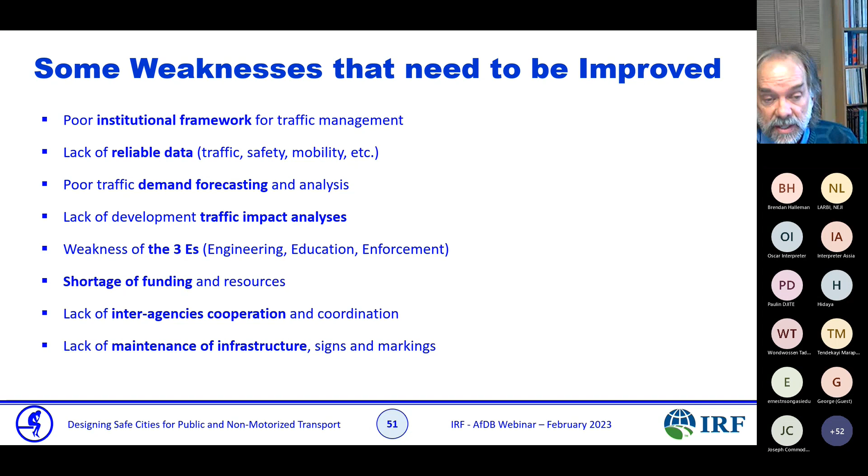Obviously, one way of doing it is having more money, so there is shortage of funding, we know that. There is also a lack of inter-agency cooperation and coordination. If agencies could work better together and cooperate and coordinate, that would help. And maintenance - infrastructure maintenance, signs and marking - is something we need to work on.

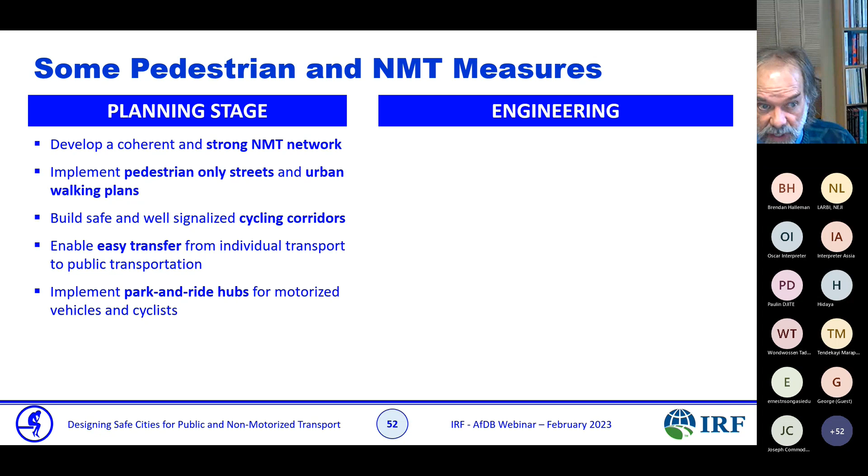So at the planning stage, what we have to do is develop a coherent and strong non-motorized transport network, implement pedestrian-only streets and urban walking plans, build safe and signalized cycling corridors, enable easy transfer from individual transport to public transportation, implement park and ride hubs for motorized vehicles and cyclists, and reduce inconvenient and unsafe detours for pedestrians and provide safe paths.

It looks easy to say, it's not easy to implement, but that's what we should be working on. In terms of engineering, what does it mean? It's improving and expanding signalized pedestrian crossings. We should have more of those, better design, and making them more visible.

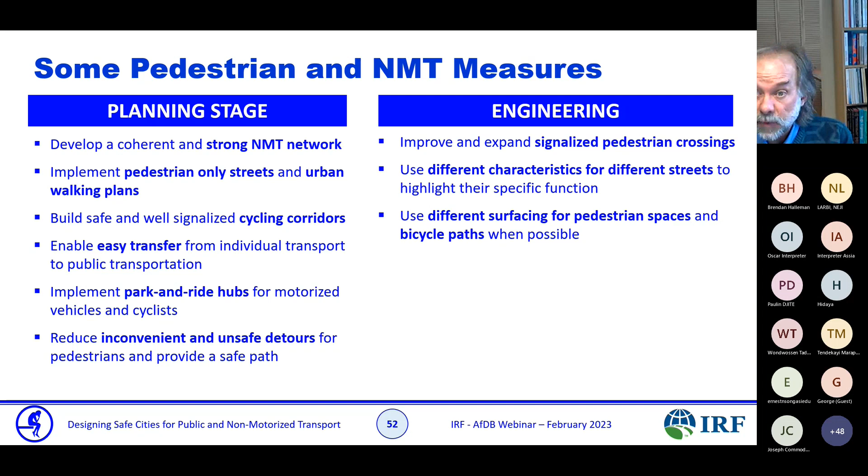If we can, we should try to use different characteristics for different streets, making sure the street talks to the motorist and they understand the function of the street. We could use different surfacing for pedestrian space and bicycle paths whenever possible. That's very helpful in differentiating where we can drive and where we should not be driving.

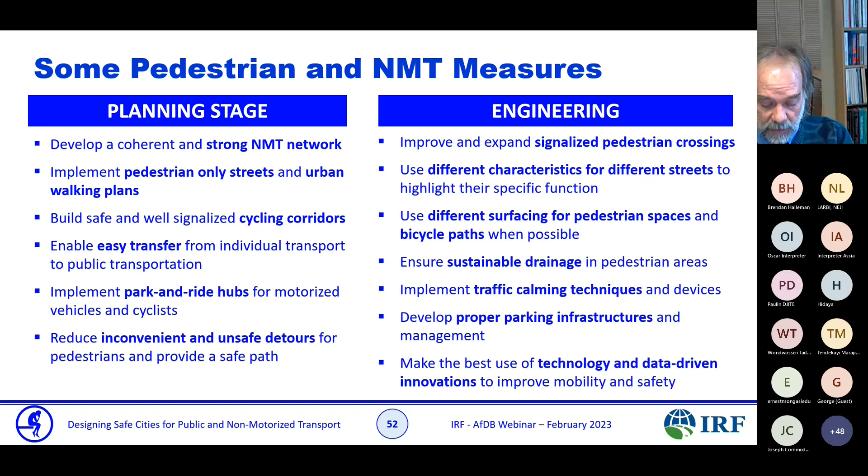Drainage is important for pedestrian areas. Very often the pedestrian areas are not well drained and people don't walk there because they cannot do it. So making sure it's well drained and well lit is good. Traffic calming techniques, parking infrastructure and management, and making the best use of technology and data-driven innovation.

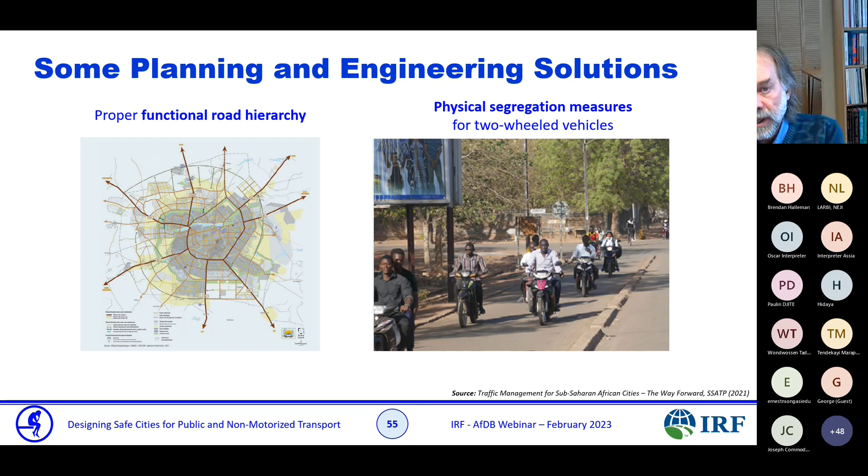And as you can see on the right hand side, the motorbike - and no one is wearing a helmet, and that's driving me mad, but they should be wearing helmets. You can see that motorcycles have their own lane through physical segregation, which is much safer than having them along with the general traffic.

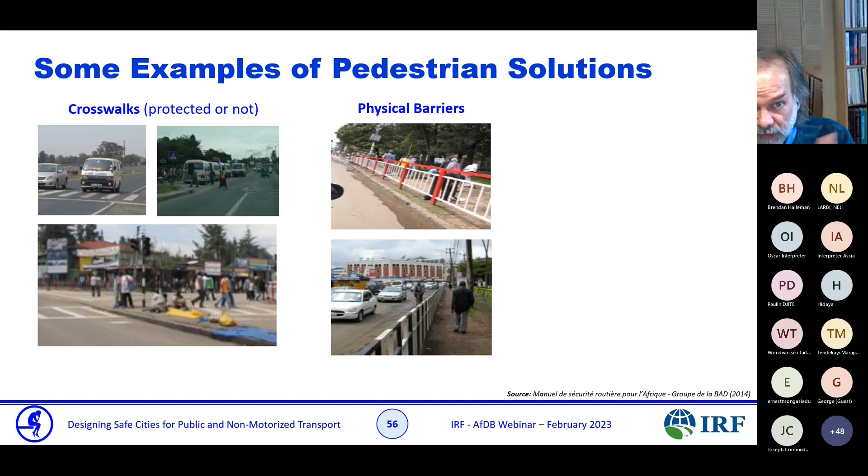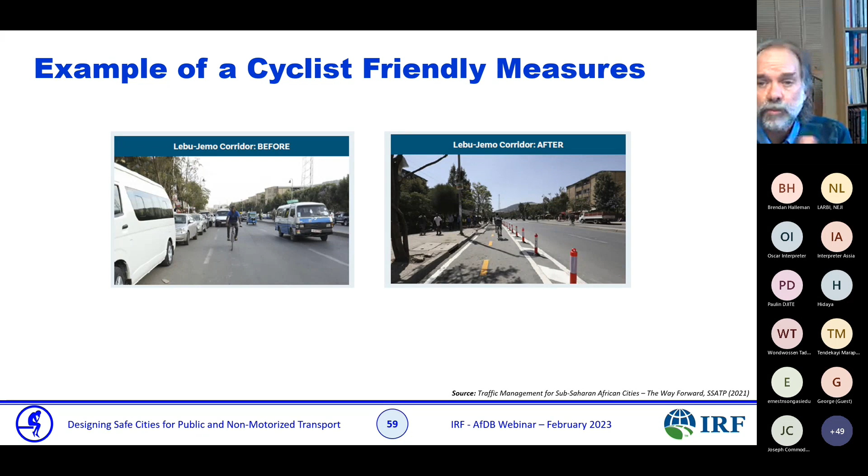A bicycle corridor, here you can see the Lebu Jemo corridor. On the left hand side, the way it was before, you can see the cyclists in the middle of the road. Here on the right hand side, you can see they are protected, with their own bicycle path, and that's much safer.

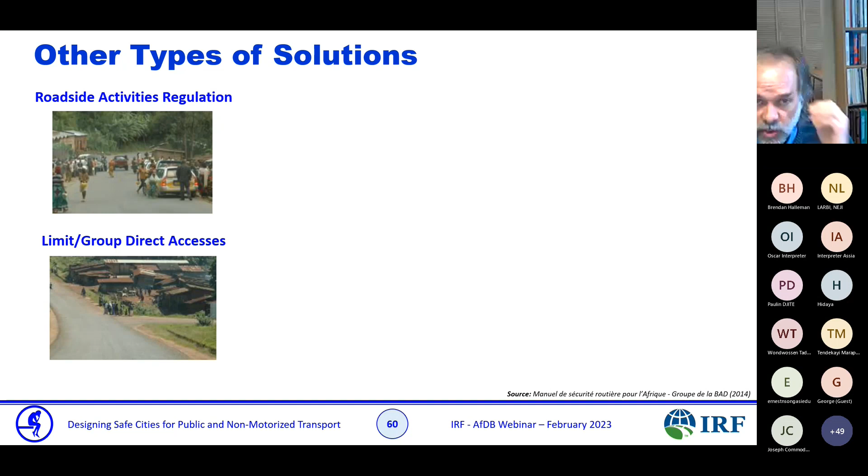Other type of solution, roadside activity regulation. We need to regulate roadside activities in Africa. That's one way to improve safety. We should limit or group access, making sure that where people want to cross the street, we have a crosswalk and can regroup them at the same spot so they don't cross all over, using barriers or different solutions.

We should try to separate cyclists and pedestrians. There are a lot of people injured by cyclists on the sidewalks. A bicycle driving fast, hitting a pedestrian, can actually kill the person. So we should be very careful about that.

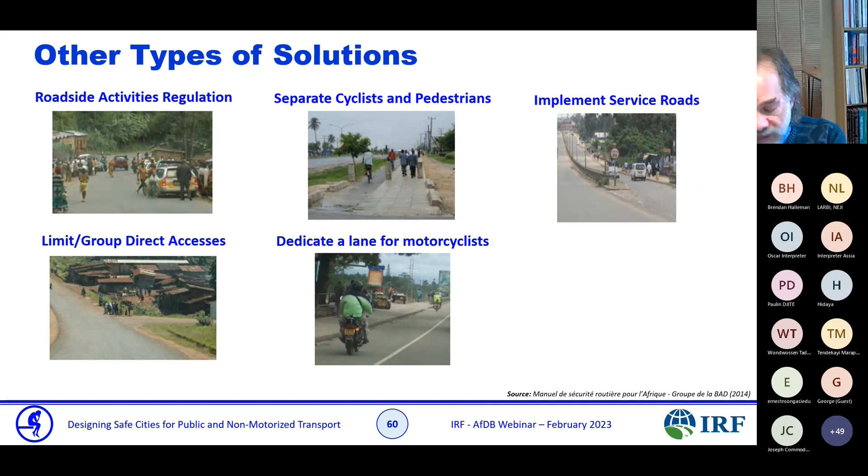Dedicate lane for motorcyclists, I already talked about that. Service roads are one way of protecting roadside activities. We create a service road alongside the main road, so you can have more activities and vulnerable users there, avoiding them on the main road. And of course, speed control.

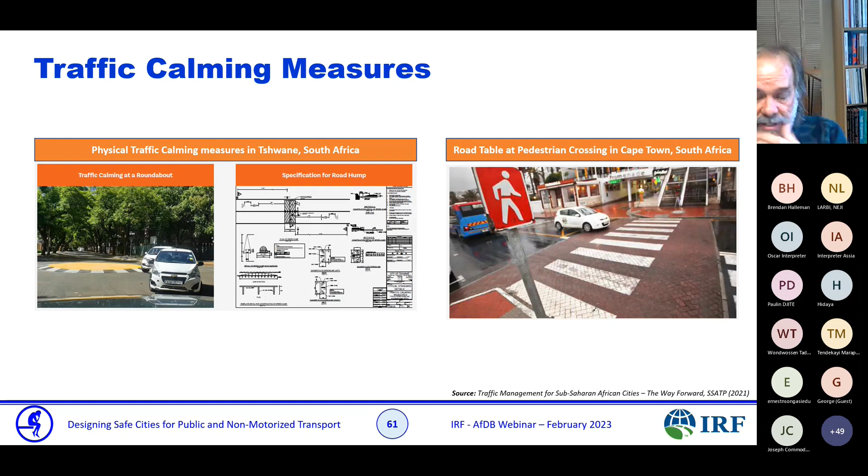That's the last physical calming measure, coming from South Africa. You can see raised crosswalk and traffic roundabout that can be used.

So in conclusion, what do we need to do? As I said, we need to make the best use of road network by managing and controlling traffic activities, provide practical, safe, and efficient, comfortable mobility for vulnerable users, maintain and increase the modal share for non-motorized transport by making transit user experience easier and safer, and finally improve efficiency and safety of all transportation modes while minimizing environmental footprint.

And how do we do that? I told you that twice, so I'll show you. We've got top-down principle and bottom-up approach. When I talk about top-down principle, I'm talking about stronger institutional foundations and a road function hierarchy, which should be done at the government level, going down.

Avoid inappropriate land use, making sure that the land use is coherent with the road use. Favor multimodal transport and improve space use for all users, making sure everybody has a place, whether pedestrian, cyclist, motorcyclist, commercial activity, or motorist.

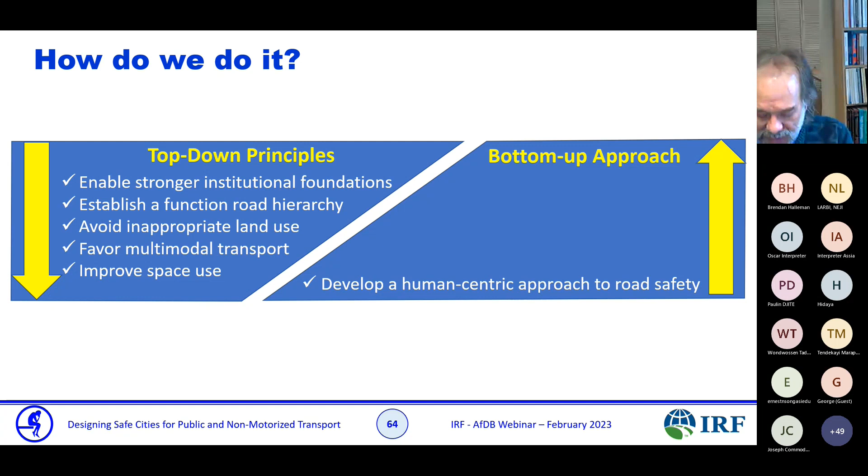On the other side, we go from the bottom up, developing a human-centric approach to road safety, making sure the human is at the center of what we do. The other point is shifting the focus away from motorized modes, stop thinking cars should be prevalent everywhere, and making sure it's human-centered.

The other one is improving safety through ITS technology, if we can, and how we can implement it. The other one is implementing the 3 E's: education, engineering, and enforcement, making sure they are well implemented.

So some key rules to remember. Remember that vulnerable users are an extremely diversified group, with different characteristics and limitations. We need to understand that and make sure what we implement respects those limitations and characteristics.

You should remember that VRUs have their own objectives, and that's going to impact their decisions and actions. If they want to go from point A to B and the shortest path is crossing the road here, they're going to do it no matter what you do. So make sure that they can do it.

And humans don't always do what we expect them to do. They do whatever they want. They are human, and we should remember that. No matter what we put in place, they are going to be doing whatever they want.

Humans process information in a serial manner, as I told you already. They can do one thing well at a time. It's funny because I have 3 daughters, grown-up women now, and they tell me women can do more than one thing at a time. Well, perhaps women can do it, but I cannot. So usually, I think people can do only one thing at a time.

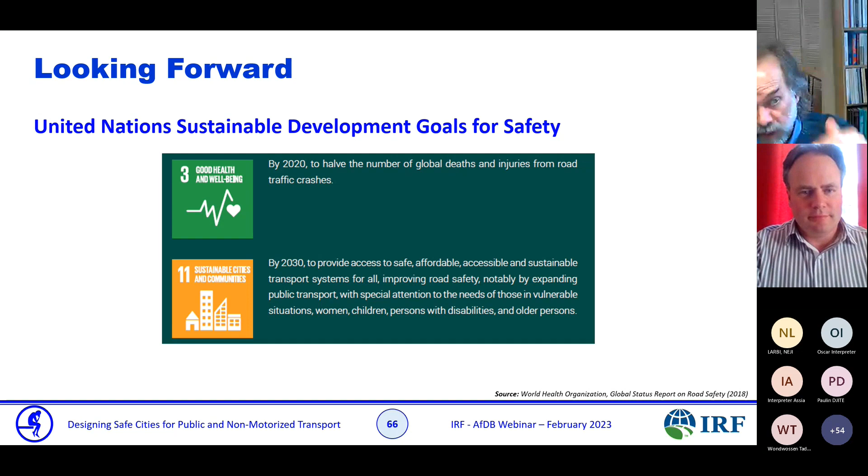I want to tell you about something Brendan mentioned, the UN Sustainable Development Goal for safety. There are goals to improve safety, and I put out something from their website. They want to reduce the global deaths and injuries from road crashes by half by 2020. That was the goal, and I have a few things here I want to show you, but you don't have to read it all.

So how do we achieve that? It's going to require appropriate management capacity, effective institutional leadership, multi-sectorial coordination, sustainable funding, and data systems to measure, target, and monitor. It's a strong goal, but I think we can make it, working together and properly.